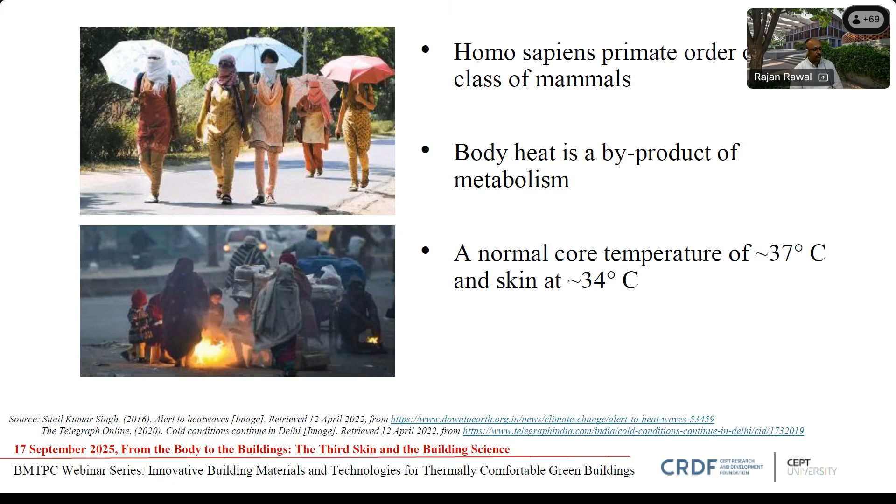If you're using smart gadgets or smart watches, it gives you a body battery as an indicator. If you experiment and remain in a 20 degree centigrade temperature all across the year, you will lose your body battery very quickly. That's an easy way to understand how our body temperature needs to be maintained at 37, and hence the immediate room environment could be around 27 to 29.

If you don't do that, you will have a certain kind of fever, we call it pyrexia or hyperpyrexia. When you go beyond 37 degrees, or when you go below, it's hypothermia, and that leads to certain cardiac or respiratory function problems. If you go higher, it will damage the cell.

Not necessarily does our entire body remain in the same steady state. If your ambient temperature is about 30 degrees, as you can see on the left side, your body would try to remain more or less in the same temperature range. But the moment you go to 20 degrees centigrade, some parts of your body will cool down just to maintain the core body temperature at about 37. So hands and legs will start sacrificing their skin temperature to maintain the core body temperature. Also, the temperature inside our brain needs to be maintained close to 37, because that's where all functions are governed.

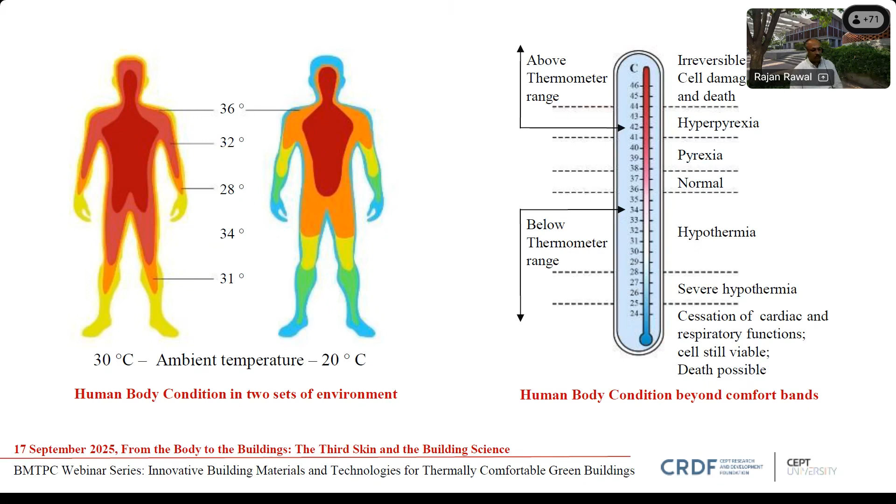If you don't do that, immediately your heart rate will go up, and psychologically you will start losing concentration. You may feel a little more irritated, and if things go beyond control, vomiting is one of the best ways our body can throw out heat.

If you cannot throw out the heat through the skin, all the food which you have taken will come out through vomiting, and you might be able to reduce your core body temperature. Beyond that, it could be fatal and needs to be addressed very quickly.

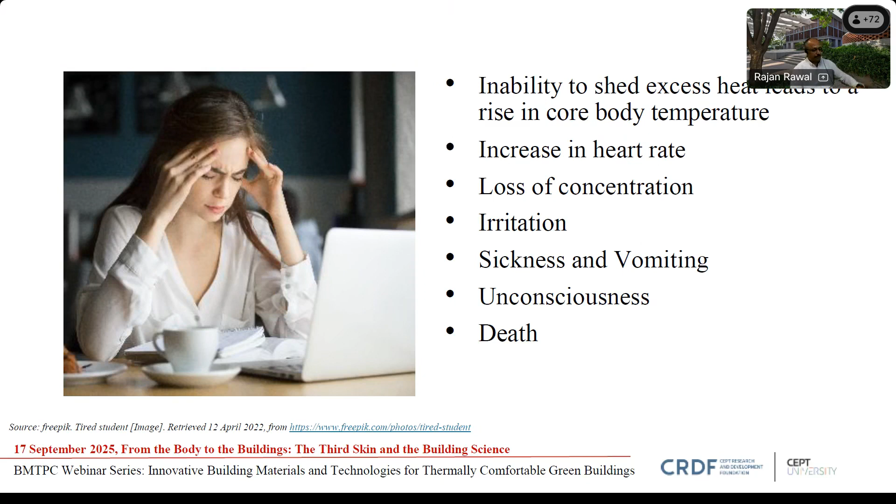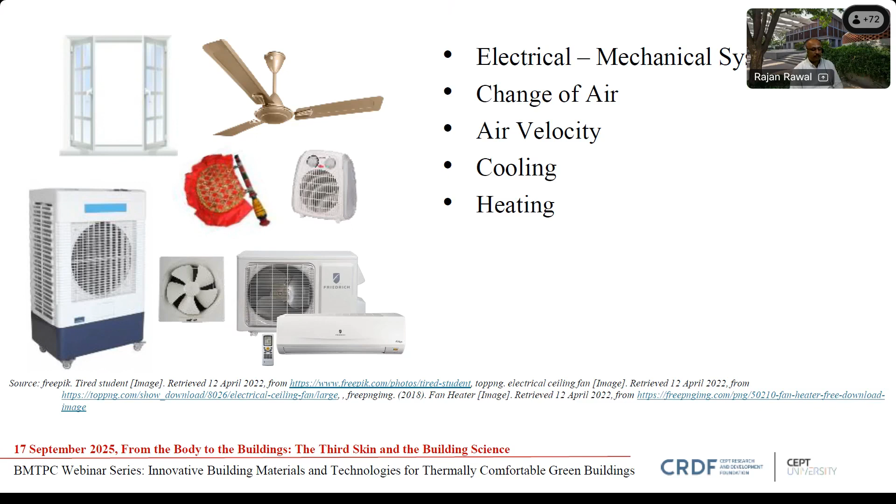Now, let me explain. To maintain our core body temperature, we use various mechanical and electrical systems, whether it's cooling or heating, and all of them cost energy. Energy has an impact on the environment, and so on and so forth.

So nowadays, access to thermal comfort has become a challenge. Not everybody has equal access to a cool or comfortable environment. Hence, at the national level, when you start building buildings, whether it's Prime Minister Awas Yojana houses or any other institutional building, thermal comfort has become a priority. It has been taken very seriously by BMTPC as well as some other government agencies.

What is very important is that generally people say, okay, if buildings are uncomfortable, we'll put an air conditioner in it and we will be able to manage the temperatures. But you know that air conditioners will consume not just electricity.

Yesterday was Ozone Day. A lot of posts came out saying that the ozone layer is now coming back to its original state, but still we have a long way to go. The kind of refrigerants we use in cooling systems also damage the environment, having a very high GWP, that is global warming potential, which also harms the environment. So it's not just about electricity and CO2, but many other gases that come out of production, or sometimes leakage of cooling devices, that need to be taken care of.

So the way we generally explain it is that it is always better to invest in buildings for the long term. We always say that the lock-in period for a building is about 60 to 80 years. If you go wrong in decision making for cooling, or for light bulbs, you might have an opportunity in 5-7 years to change that and correct your mistake. But if you make a mistake in a building, you will get locked in for about 60 to 80 years before you start changing, reconstructing, or retrofitting your building.

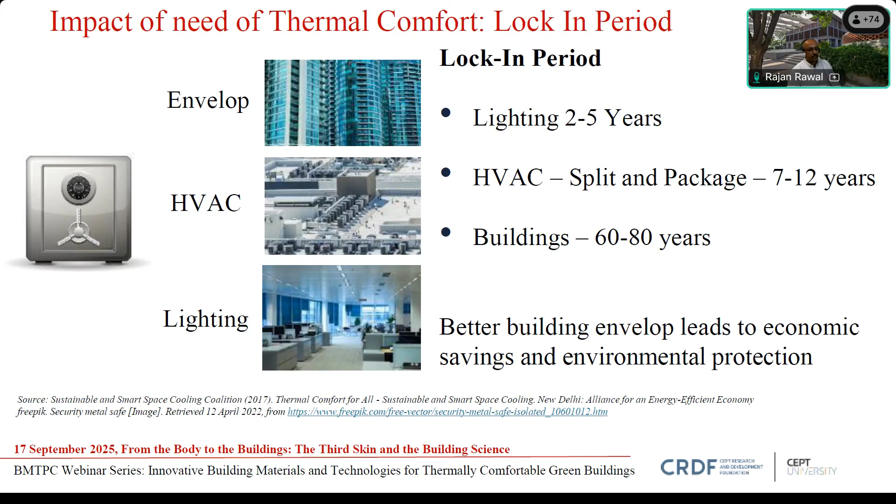So it's always important, economically also, that we keep investing ourselves into better building design and construction, and more so nowadays, not just in design and construction, but also in the operational part of it.

Some of the numbers which you might have seen in earlier webinars show that urban and rural population is going to go up. What is very, very alarming now is that throughout the coastal belt, from Bhuj in Kutch to Jamnagar to Surat to Mumbai to Goa, right on the Kerala coast, or then you move towards Tamil Nadu.

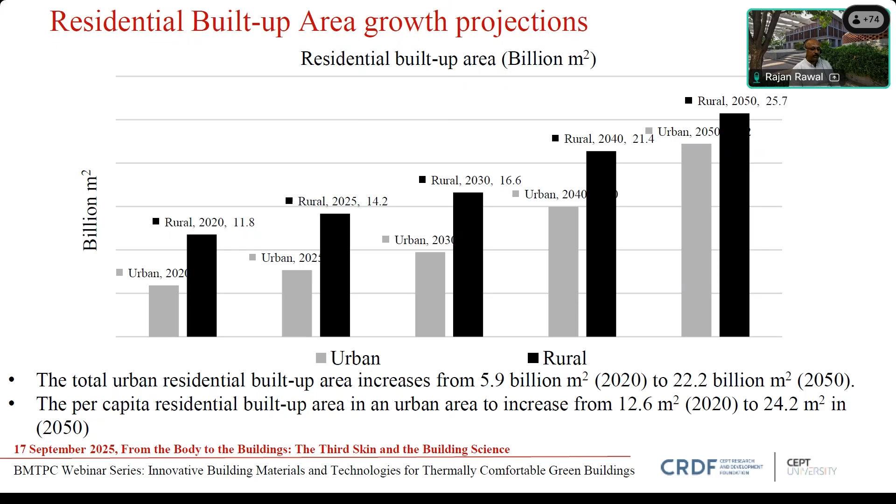Lot of cities located in coastal areas are going to face not just air temperature rise, but also high humidity. This is where Shaileshji mentioned heat stress, and I'll explain later the difference between thermal comfort and heat stress. Heat stress is where physiological functions get compromised and productivity goes down.

Over the years, we are getting more and more hotter days, not just hot days but also longer spells. Earlier we used to get about 40-42 degrees for about a week or so. Now 42 degrees remains for about 20 days in many parts of the country, going up to about 45-47 for a couple of days.

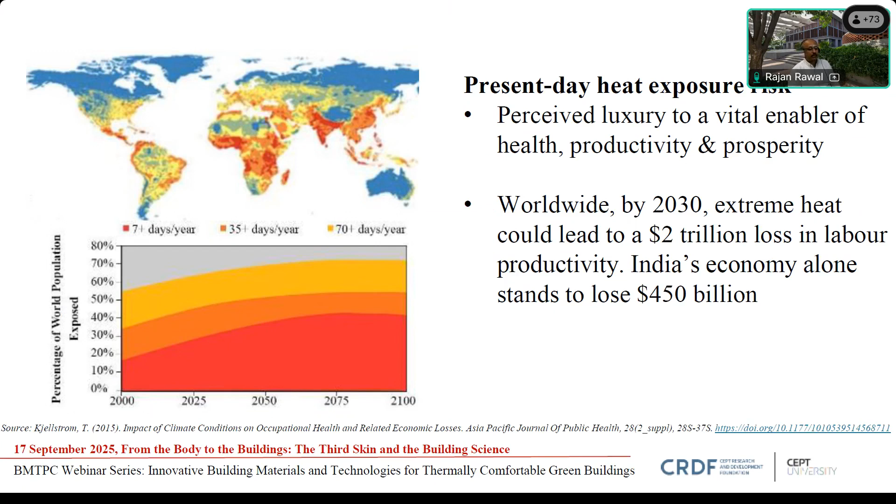That is where it's not just about the peak, but the consistent peak getting longer in terms of days. So let's understand thermal comfort. We understand it with 4 environmental parameters and 2 personal parameters. The environmental parameters are air temperature, relative humidity, air velocity, and mean radiant temperature. I'll explain them in a while. The 2 personal parameters are metabolic rate and clothing value, the amount of insulation on your body.

Other than that, acclimatization is a short-term physiological adjustment. If you move from one city to another for a weekend or 7-8 days, you might acclimatize as a short-term adjustment. But if you spend about a year or more in a city, for example someone going from Jaipur to Chennai, it might take about a year to get acclimatized to high humidity, or vice versa. Someone from southern India moving to Rajasthan also needs acclimatization for lower relative humidity.

Other things matter too, like body shape and fat. BMI definitely makes a big difference. The higher the fat, the lesser the ability to push heat out, and hence one needs to sweat more to push body heat out through the fat.

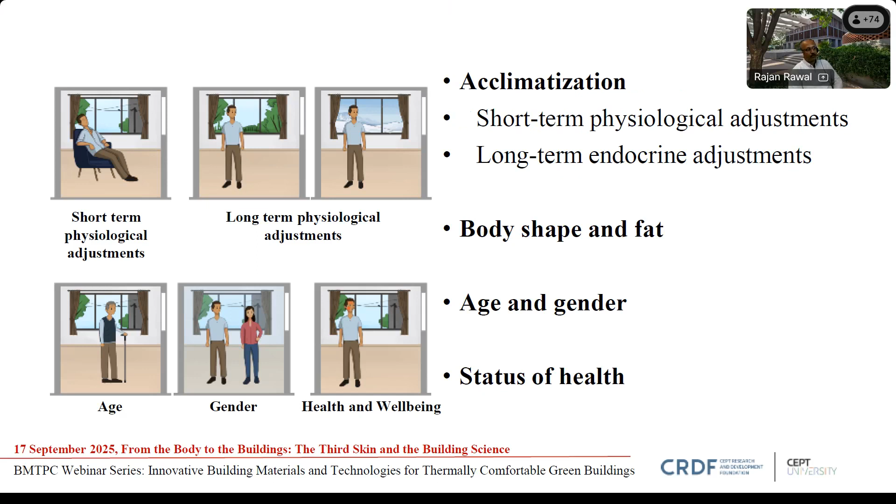Sometimes the status of health also matters - if someone is under the influence of medicines or even alcohol, that affects thermal sensation and thermal comfort. But these are things we really don't consider when designing a policy or a building. We focus a bit more on these four plus two parameters.

At the same time, your body does not remain at the same temperature across its surface. The forehead and top part of the body try to remain more or less at plus minus 34-36, versus the foot and calf, which has a huge range of about 10 or even sometimes 12 degrees centigrade. So if you're at a neutral temperature of about 27, your forehead would be about 35, deviating to about 31 on the lower side, or up to about 2 degrees higher if outside temperature is higher. So it deals with a delta of about 4, 5, or 6.

But if you see at the bottom, the foot has a delta of about 13 degrees. That's where the ability of humans to adapt to both immediate outdoor and indoor environments makes us a bit different from the rest. So we have high adaptability, as you can see here - a wide range of temperature can be adapted to.

Now the problem is that when anyone starts exposing themselves constantly to a narrow band of temperature - for example, if I remain in a temperature band of 24-27 all the time, 24/7, in an air-conditioned office, in air-conditioned transport like my car, aircraft, or public transport, or in an air-conditioned home, bedrooms or living rooms - constant exposure to this narrow band of temperature will reduce our adaptability over a period of time.

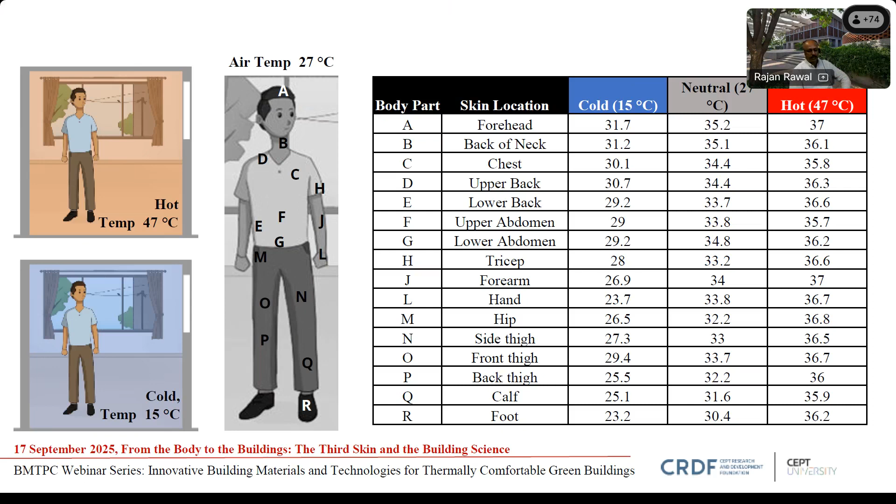Coming to those four environmental parameters: air temperature, many of you know what it is, measured in degree centigrade. Relative humidity, and now this is becoming more and more crucial nowadays because more vapor is available in the air.

All that ice and all those glaciers melting is not just turning into water, but high temperature is also turning that water into water vapor at some point in time. And hence the high humidity across the world has taken the attention of many people working in this area.

Relative humidity is basically the amount of vapor in the air. Now many of you might know that if air is at high temperature, it can absorb more vapor, versus if air is at lower temperature, it can absorb lesser vapor.

That means very high humidity, that means there is no additional space for vapor to get in. It's 100% saturated air, and it will start condensing if it is at 10 degrees centigrade.

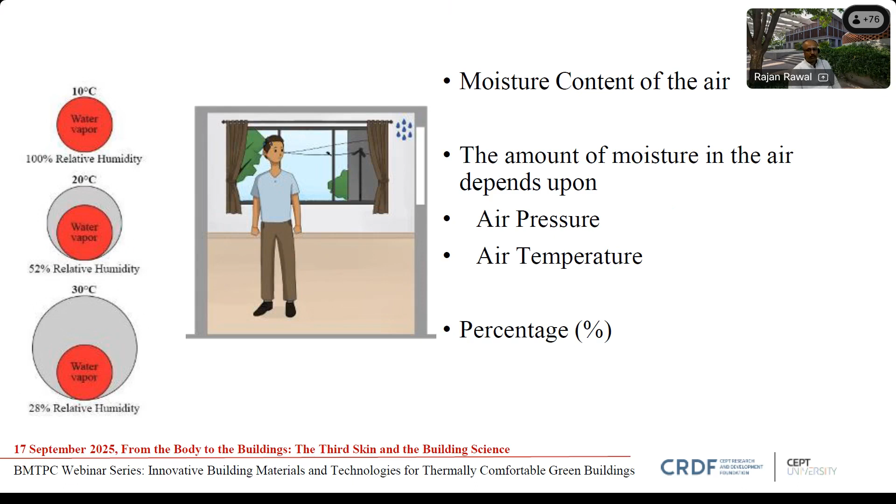But towards the monsoon side, when temperature remains high and humidity remains high, people get into a very uncomfortable situation. And actually that gets translated into market trends - the sales of room air conditioners pick up more near the monsoon than at the onset of summertime.

Along with that, a very important element, which is mean radiant temperature. You might have observed that your room is at a comfortable lower temperature, but because the walls and roof are at high temperature, they're warmer, you feel a little bit more warm.

This is where our human body works with an immediate - I call it a third skin, which is the building skin - such that if the surface temperature of a wall and roof is higher, even though air temperature is lower, still you will not be able to feel comfortable.

Many of us have experienced this when traveling in air-conditioned bus coaches, or in cars with the air conditioner inside - if solar radiation is hitting your window pane or windscreen, you will still feel very uncomfortable. Indoor temperature may be set to about 18 or even 20 degrees, but constant radiation hitting your skin will make you very uncomfortable.

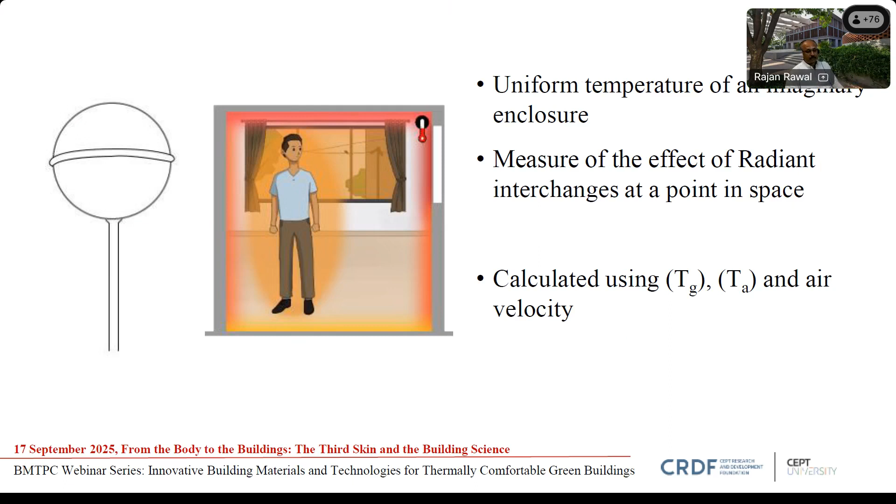And that is where mean radiant temperature comes into it. This parameter has the highest impact on our human body because it interacts with the skin permanently. Even if you are wearing clothes or even a blanket, sometimes the infrared radiations do exchange.

Air velocity, we have very well understood. The moment you start a ceiling fan or a pedestal fan, or if your windows are open and you get a breeze inside your house, you will start feeling more comfortable.

This is primarily because the air which is touching your skin takes away the hot temperature, so a higher skin temperature gets absorbed in the air and the air moves on. So basically in thermodynamics, we call it convection - because of the high convection, you are losing body heat.

So if you are feeling very uncomfortable towards the warmer side, you get inside the room. The moment you start the ceiling fan, your body will start losing heat in a much better manner, and hence the air will pick up the heat and move forward. So that's where air velocity becomes more important.

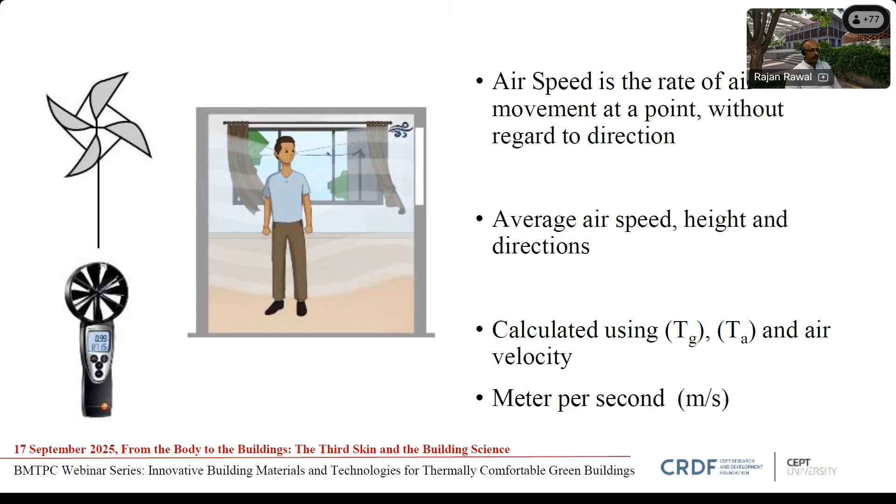Obviously, the clothing, what you are wearing, if you're just wearing a swimsuit or a cotton t-shirt with half sleeves, you will feel a little bit more comfortable, versus a three-piece suit which will make you uncomfortable because the clothes are also an insulation on top of our skin.

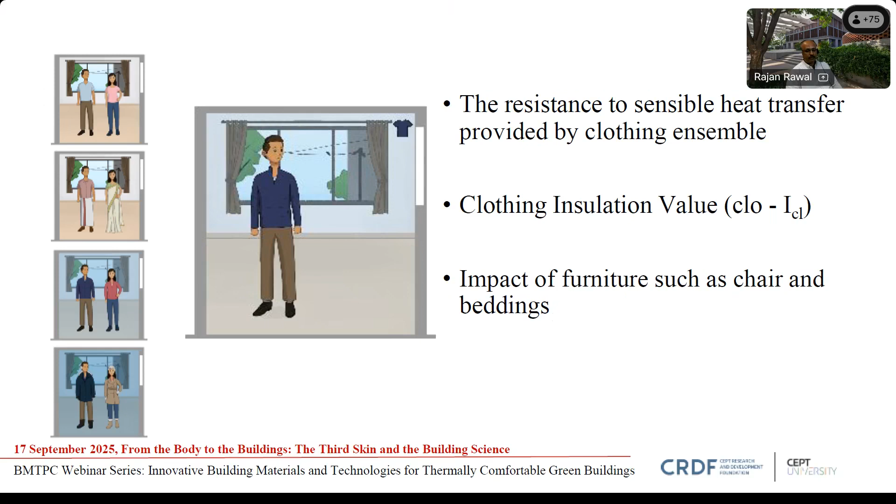So the way we explain it is that skin, what we've got, is a biological skin from nature - that's the first skin. The second skin is what we wear, which is clothes. And the third skin is what the buildings are. If these three don't interact with each other, if we don't understand these three all together, we might not be able to solve the kind of problems which we are trying to.

The sixth one is the metabolic rate. So if somebody is gymming, the person is definitely burning a lot of calories in their body. That calorie generates heat, and that heat needs to go out. On average, if a person is in a sedentary position - for example, if you're writing or typing on a computer - you might generate about 60 to 65 watts of energy. A normal adult has about 1.8 square meters of skin area. But if you are gymming, you can emit up to about 180 or sometimes 200 watts of energy. While you sleep, it goes down to about 40 or 45.

So the amount of body heat you generate needs to be taken out of the building. And buildings are not really designed to do that, and hence many times we use air conditioners, especially in areas where heavy workout or heavy activity is taking place.

Now I know many people will also talk about the quality of air in gyms or in auditoriums where you have a lot of people, but we are right now not talking about environmental quality there. We are just focusing on the thermal side, or thermal comfort side, of the body.

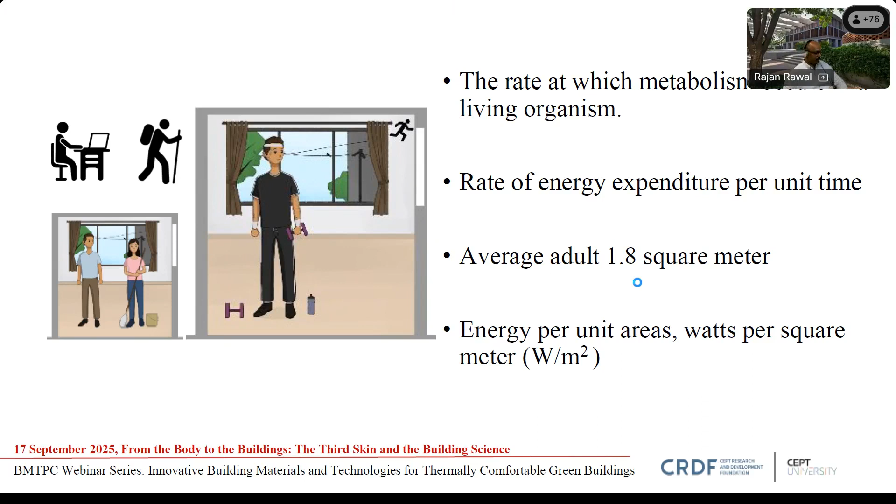So what is the definition? The definition is that it's a condition of mind that expresses satisfaction with the immediate thermal environment, and it's basically measured through subjective evaluation. Now, this is one of those rare scientific definitions accepted across the world which doesn't have numbers and doesn't talk about any particular formula. It says that it's a subjective evaluation.

That means it is a vote. So if somebody has to say what is your BMI, the body mass index will have a certain kind of formula, and it would say per person it would be X and Y and so on and so forth. But here it is more like a vote, where it says, yes, I'm comfortable, or I'm not comfortable. Now when I say I'm not comfortable, it has two dimensions to it.

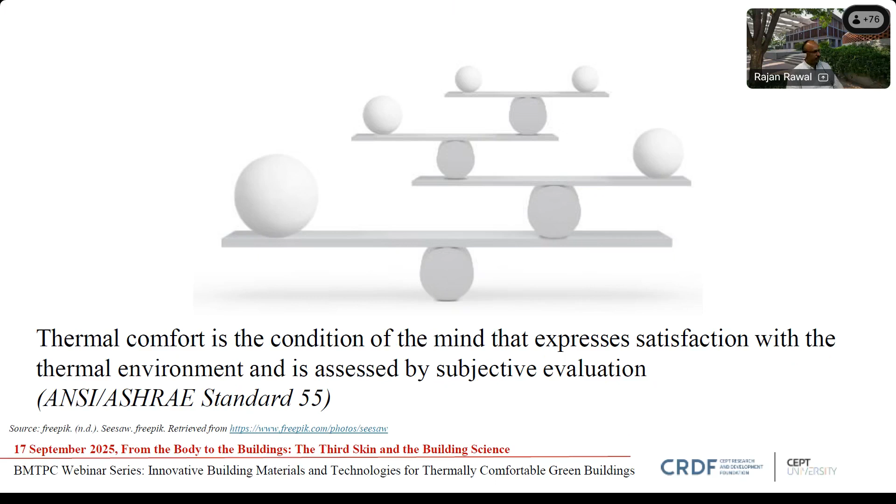But before that, let me explain that our thermal sensation does change depending upon where we are. Psychologically, that makes a lot of impact on us. So the way you perceive thermal comfort, the way you want to have thermal comfort in a 5-star hotel or in a cinema theater, you do not expect the same kind of thermal comfort when you go to a vegetable market, because psychologically you know that the vegetable market is a naturally ventilated building and it cannot provide you the same kind of cooling or comfort which you generally expect in star hotels, aircrafts, airports, or even cinema theaters.

So because our mind is very closely monitoring what the skin temperature is, it has a psychological and behavioral impact. And hence, it is more like a vote than an absolute value.

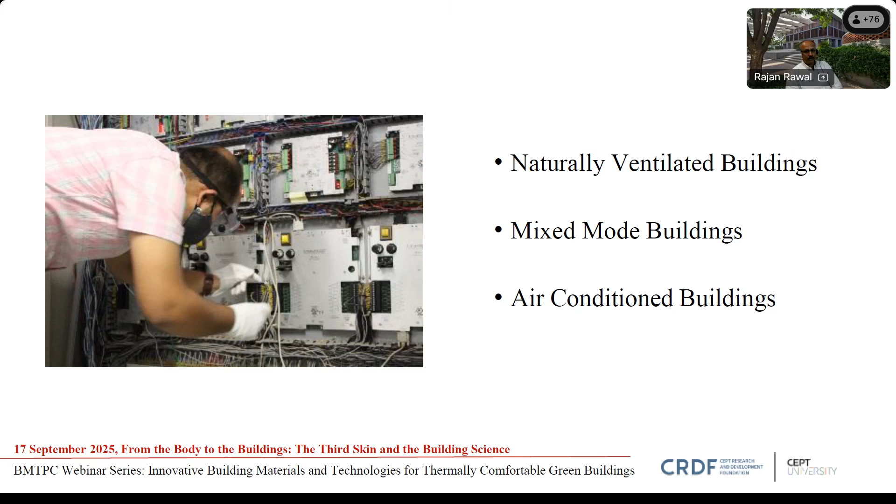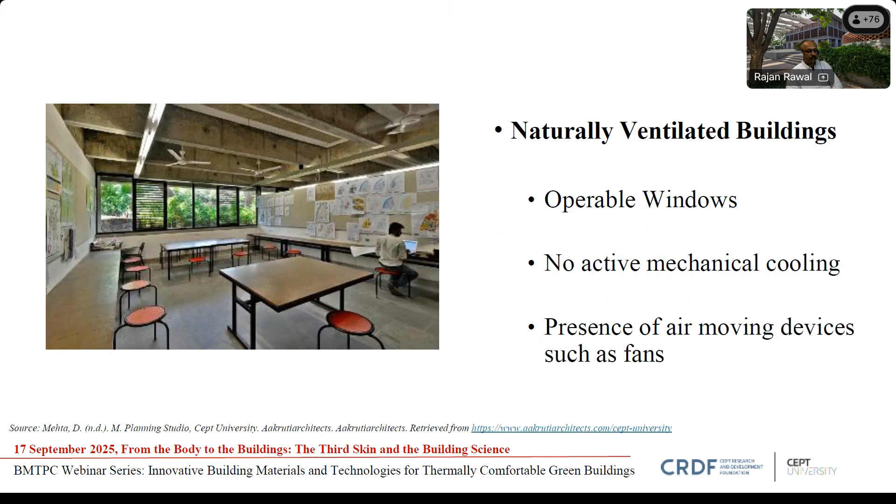So when you are in a naturally ventilated building versus an air-conditioned building, you have a different kind of opinion about thermal comfort. So what is a naturally ventilated building? Basically a building where you can open windows, you have no active mechanical cooling - you may still have ceiling fans, but you are not compressing the air or changing the property of air beyond the air velocity. These are called naturally ventilated buildings.

Mixed mode buildings are somewhere in between. They do use air conditioner at some point in time, but they do not use air conditioning at other points in time. For example, many of our residences, where in summertime, summer nighttime, bedrooms become air conditioned, but the rest of the house is not air conditioned, or the same bedroom does not get conditioned during the winter time.

So there are various subtypes of mixed mode buildings. Some of them are spatial mixed mode, some are temporal mixed mode, and the third one is concurrent mixed mode.

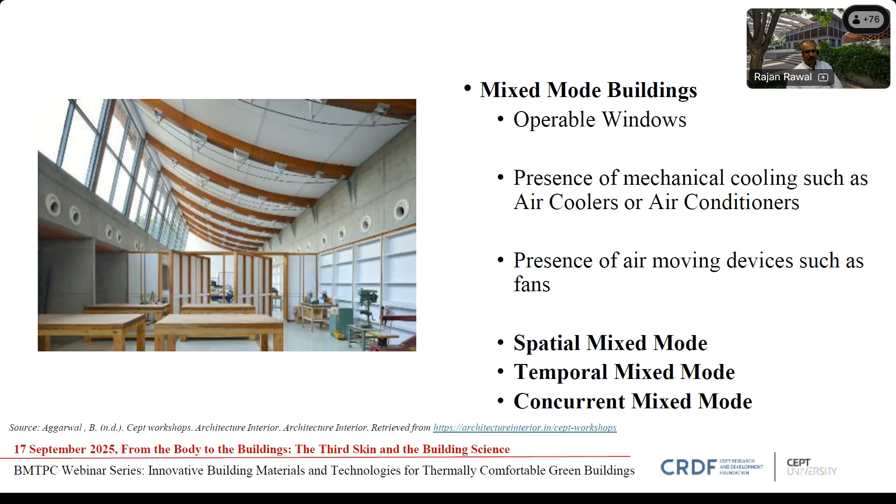Concurrent mixed mode is very similar to what our wedding shamiana, book fair, or automobile trade fair looks like, where your windows are open but air conditioning is also running. So it's a concurrent mode where air conditioning is running, windows or doors are open, and you are trying to get thermal comfort.

Air conditioned buildings are generally sealed buildings, using compressors and air conditioners, and most of the time it gets operated when there is occupancy.

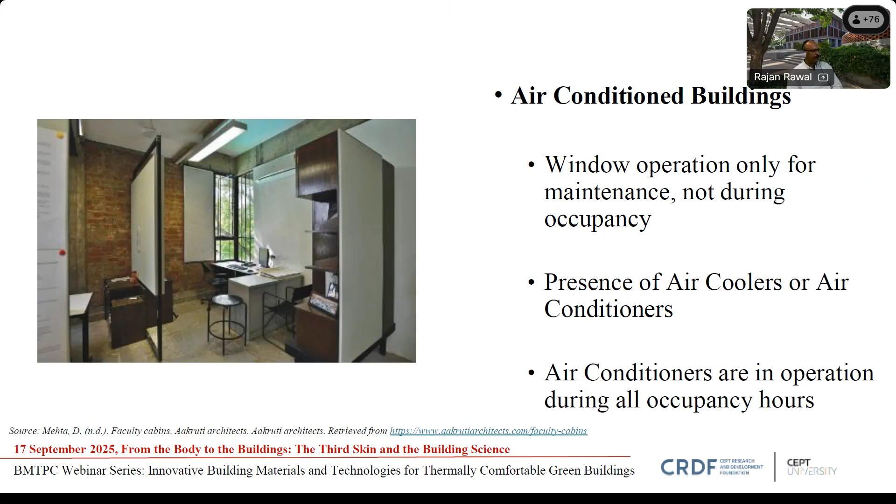So this is what I was talking about earlier, that any kind of thermal comfort gets assessed through four votes. And when I say vote, it's not a value, but simply an opinion. For example, four parameters: sensation, acceptance, preference, and satisfaction. I'll talk about that in a while.

So if I ask someone, are you thermally comfortable, that depends upon what that person is saying about its sensation. The way to ask is, are you feeling hot, or cold, or neutral? That is what we call sensation - what is your sensation at this point in time? But that sensation is not enough for us to judge whether the person is comfortable or not.

We would also like to know the acceptance. Sometimes you feel warm, but you want to feel warm after coming from a very cold area. And if the warm immediate environment is acceptable to you, then it's fine. So that comes to preference.

So that means, are you comfortable? You say, no, I'm feeling a little warm - that's a sensation. Is that acceptable to you? I would say no, it is not acceptable. Then the third question comes - if it is not acceptable, what do you prefer? People say, I prefer a little cooler environment. These three things come together and tell us whether the person is comfortable or not.

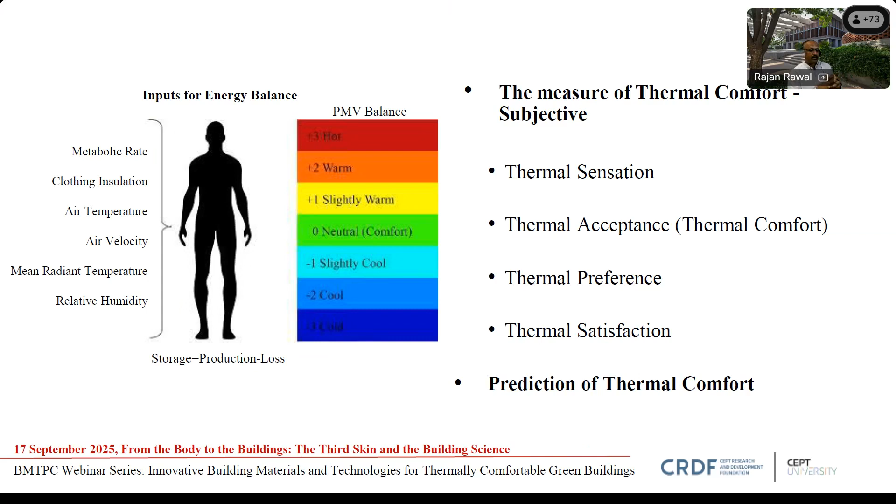Largely the Indian population, if you ask people what's your sensation vote, they say, oh I'm feeling comfortable, I'm fine, I'm just okay. Then if you ask, is that acceptable to you, they will say yes, it is acceptable, I don't need anything, I'm fine.

But when you ask, what do you want to be - if given a chance, if you want to change your condition - I would say 90% of the population in India say we want to be cooler. And this is where the aspiration of the person comes into the picture: I am feeling comfortable and okay with that, but if you can give me, I would like to be cooler. Now that is where you are paying a penalty on the environment.

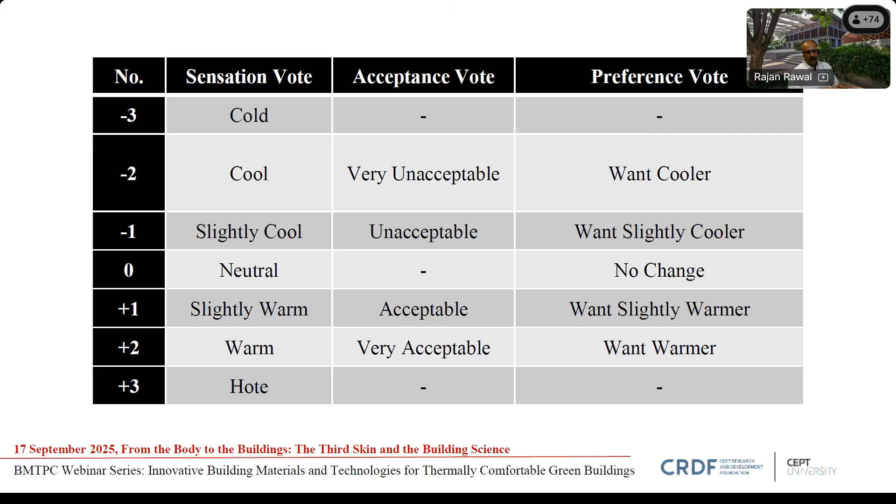You're not just paying on environment and economics, but also putting a penalty on your own body, where you know your body could be comfortable at 27 or 29 degrees, but you still want it to be 21 degrees. That means you are putting your body into thermal stress, and hence you will spend more calories to keep your core body temperature at 37. That means you require more calories, hence you will eat more, and so and so forth.

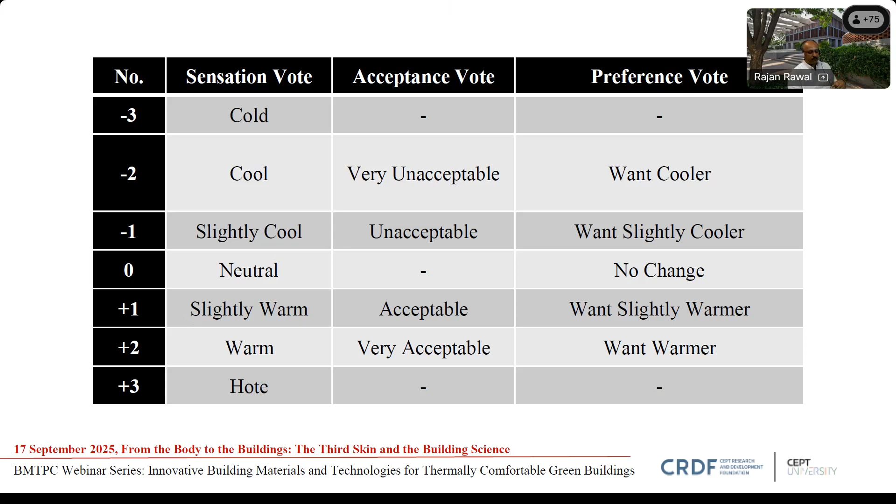So basically it's a downward spiral we get into - conditions are good enough for us to operate, but given a chance we want to be cooler, and that means a whole lot of other things, as I explained. That's a bit of a concern for many of us.

So when you put all these parameters - air temperature, radiant temperature, and velocity - all together, and the person says I'm comfortable, that means it's neutral, and that is what we call it. 100% people being satisfied - but it is very, very unlikely that in any building 100% of people are 100% satisfied.

That means we have to have a certain kind of band, under which for whatever reason - whether BMI, or because somebody has migrated from somewhere, or is under health conditions different from the rest, or wearing different kinds of clothes - they might feel uncomfortable towards the warmer side. So generally the guidance we try to provide is to accept that 20% of people may be dissatisfied.

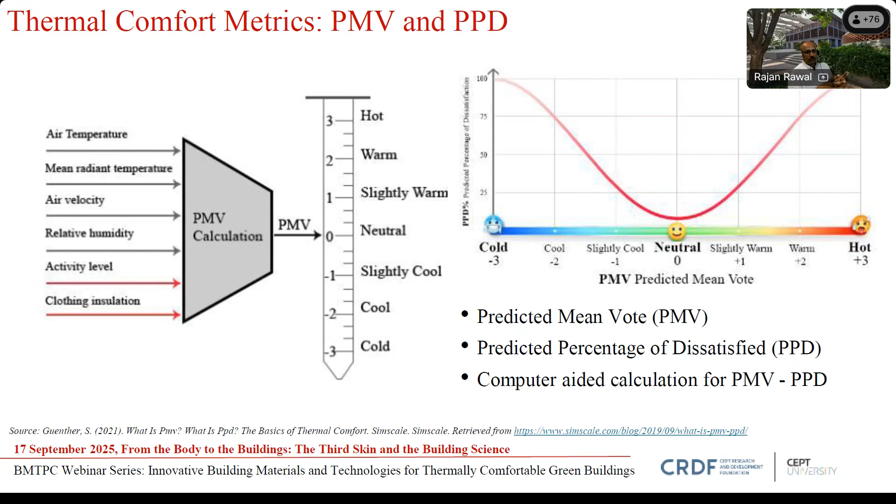We call it predicted percentage of dissatisfied, PPD. If you look at this graph, which is a bell curve, where if you move towards slightly warm or slightly cool, the vote is +1 or -1. The moment you hit close to +1, about 20% of people are not going to be satisfied, and we say okay, it's fine. 80% of people are comfortable, and that is what all buildings can target and achieve.

What is the impact of that on the policy?

The Eco-Niwas Samhita, which is the residential code relying on Residential Envelope Transmittance Value, RETV, has taken up these conditions so that our houses should not become hot and there has to be some degree of comfort. Hence, they adopted something called degree discomfort or discomfort degree hours. That means in that particular house, based on its design and construction, the discomfort degree hours should be less than X amount, and if you read that you will find what this X means.

The same thing has been adopted in the National Building Code, looking at the diversity of our country, from Meghalaya and Arunachal Pradesh to Rajasthan and Gujarat, from Jammu and Kashmir, Ladakh, to Maharashtra, Nagpur, Vidarbha, and Kerala. It's very difficult for people to come to one value acceptable to the entire Indian population.

So the National Building Code and the Energy Conservation Building Code from the Bureau of Energy Efficiency say we don't prescribe a single value, we prescribe a band of values. That means if you are within this range, you should be good enough, and that range could change depending on where you are located. Sometimes people coming from a hotter environment would like to keep higher temperatures, and people from cooler environments would prefer lower ones. But for a building designer, it's important that they don't need to hit one value — it's a band they have to play around with.

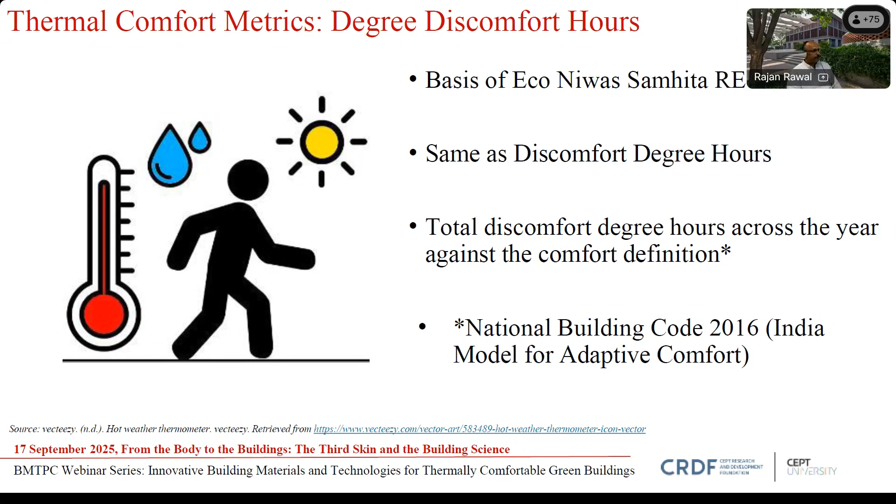If we try to understand this physiologically, people started looking at it in 1930 — how much heat you produce, what's your skin condition, your sweat, your clothing, and how much heat you're able to reduce. We call this a heat balance, similar to physics or even accountancy, like a profit and loss balance account. The amount of income and expenditure, if it becomes zero, you don't need to worry about it.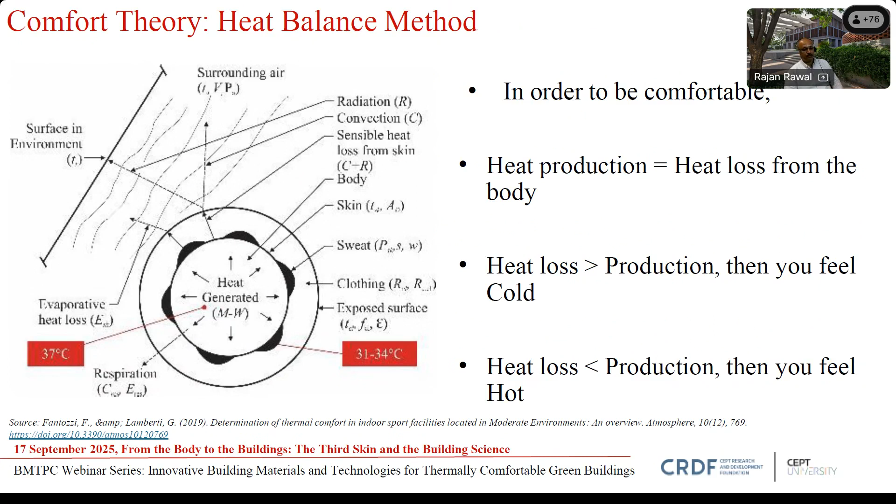The same happens here — if the amount of heat you generate can be put out of your body, you are comfortable. That's the concept people follow: how do you produce heat? Through metabolism, you gain some through conduction, convection, radiation, you shiver, and you also lose heat through evaporation, which is perspiration.

If you hold a warm cup of coffee, that's conduction. If you sit in the open air or at the seaside, that's radiation. When you switch on a ceiling fan, that's basically convection — that's how you also lose heat. When you balance between these, you will be comfortable.

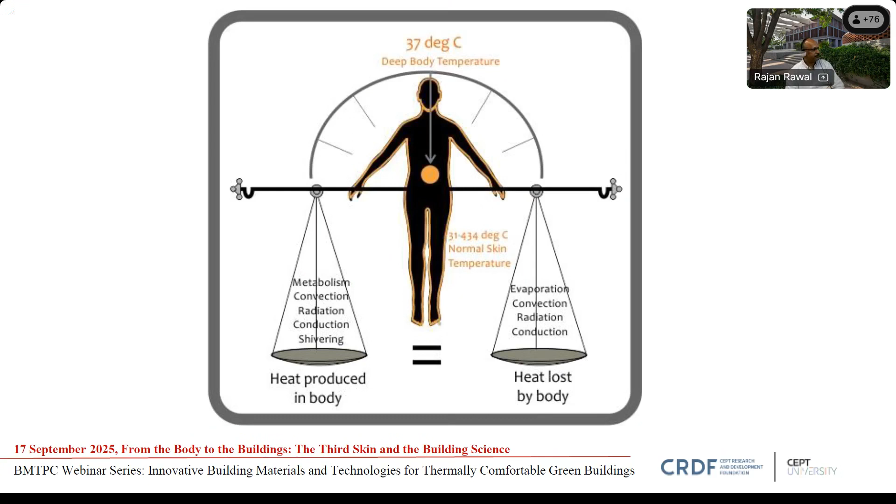There are equations behind this which I won't get into in detail, but what I'm trying to explain is that the body also stores some heat over a period of time, and that needs to be accounted for. When I move from a very hot environment outside into a very cool environment, it takes a little time for us to adapt — this is because the heat stored inside the body also needs to be released over a period of time.

Now, let me explain this and then go on to the heat stress side.

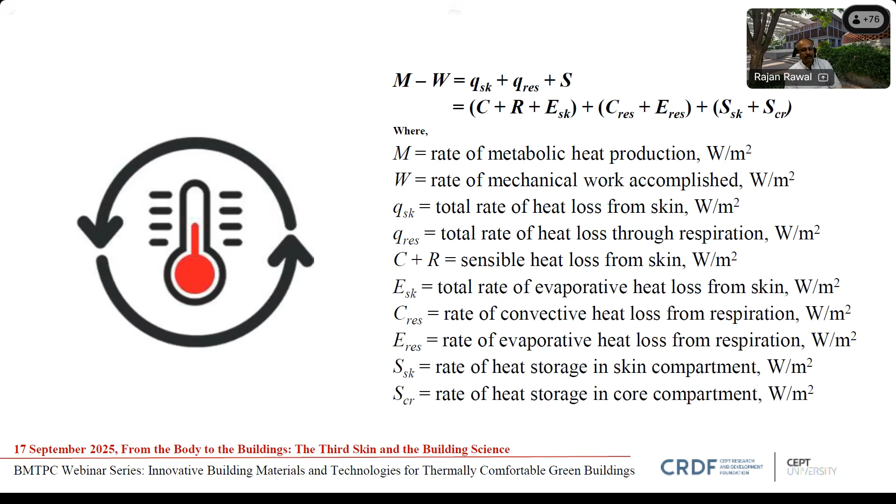The equations, which are physics-based, had a lot of limitations, and this was practiced until 1990. But from 1995 onwards, all of us realized that our body is not like physics, it's not like a machine — we have a mind, certain aspirations, and feelings. So it's not just about physiology, but psychology and behavior also play a role. The newer codes and guidelines, like what BMTPC follows, are based on what we call the adaptive thermal comfort model. As I mentioned earlier, when you go to a vegetable market, you know it cannot provide you 22 degrees centigrade, and you accept it.

That's where the psychology works. When you are coming from outside to inside and you feel that it's warm, hot, or cold, you don't really start cribbing. You wait for about 10 to 15 minutes before you start feeling comfortable. And that's where the psychology comes into the picture.

Second is behavior. When you are allowed to change your clothing, when you're allowed to change your position - we have seen multiple times in cinema theaters that people take a shawl with them, and in the middle of the movie they will wear the shawl. This is where behavior comes into the picture. You are allowed to behave in a certain manner, and the moment you allow people to behave in that manner, they would be more comfortable because that's directly related to psychological aspects.

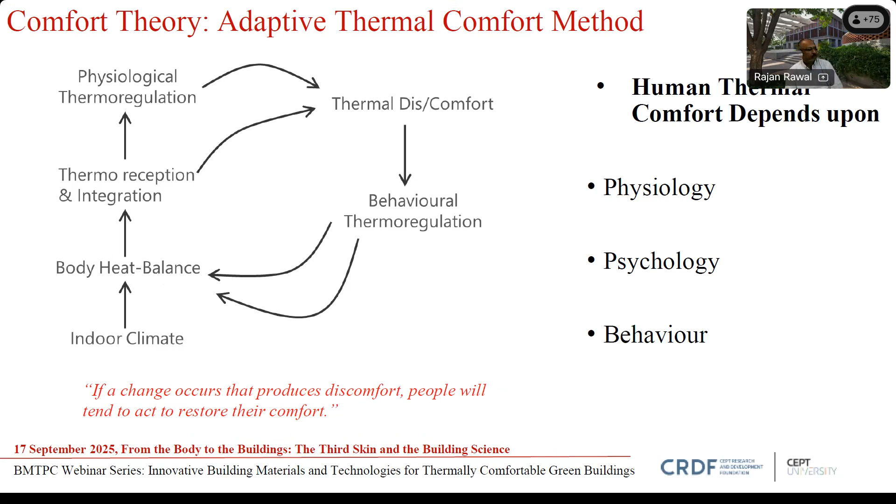So all newer work and the newer policy which the government of India is following is based on this adaptive model, where your building also needs to respond to multiple directions. Let's talk about this, where the building, which is the third skin, comes into the picture. Just focus on the right hand side for a while. There's something called mean radiant temperature asymmetry.

Basically, we are talking about air temperature difference and surface temperature difference. So if your surface is warmer than air, what happens? Let's say if you have a ceiling which is warmer by about 15 degrees centigrade, you are likely to have about 40% of people dissatisfied. That means my ceiling is very, very important, and any change in ceiling temperature affects people much quicker and more widely. Versus if I have a cool wall...

Same 15-degree asymmetry, but a cool wall will make about 20% of people dissatisfied. If I have a cool ceiling, I will make probably about 8% of people dissatisfied. And when I have a warm wall, I'll make about 2% or 3% of people dissatisfied. Now, what does it mean?

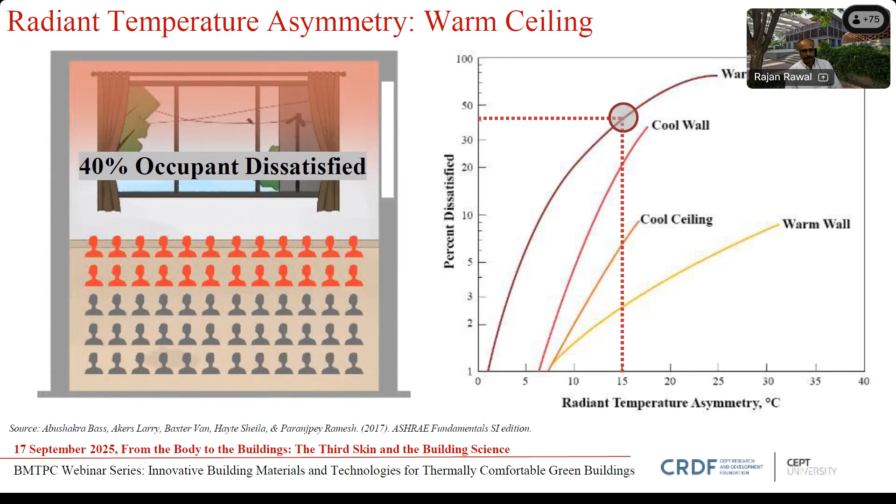As a building designer, or someone who constructs or manages the building, the learning here is that if I have 5 rupees or 10 rupees to improve my building, I will put that 10 rupees on my ceiling. I'll try to reduce the surface temperature of my ceiling. Then if that ceiling is done in 8 rupees, probably I'll put another 2 rupees so that my wall does not become very cool.

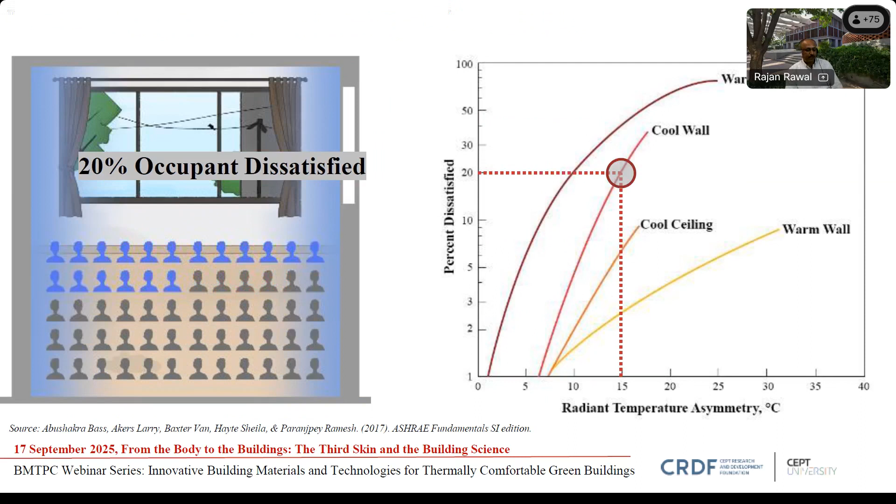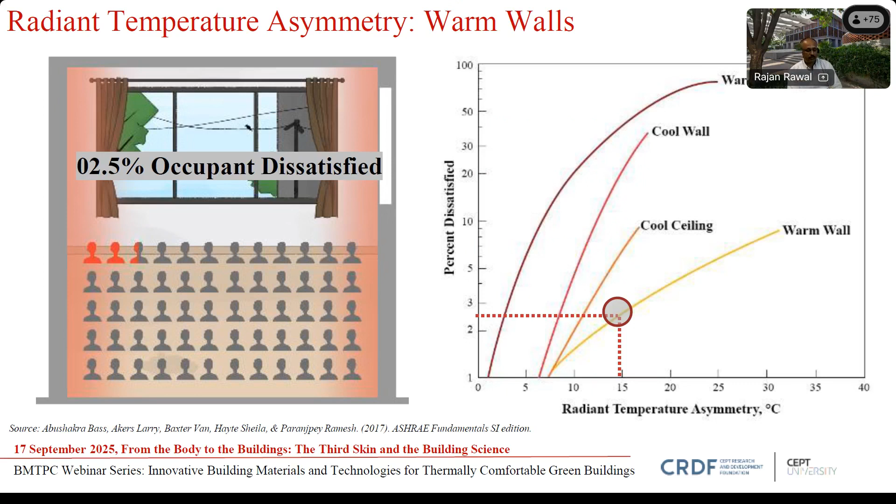Then I will probably try to do something with a cool ceiling, and then try a warm wall. This is how the body behaves with its immediate surroundings, because exposure of the skin or body part to a warm wall and a warm ceiling is different. If I'm talking about ceiling, just my head is directly exposed to the ceiling along with my two shoulders. But if I'm talking about wall, a lot more exposure - my entire body is exposed to the wall. So these things matter over a period of time.

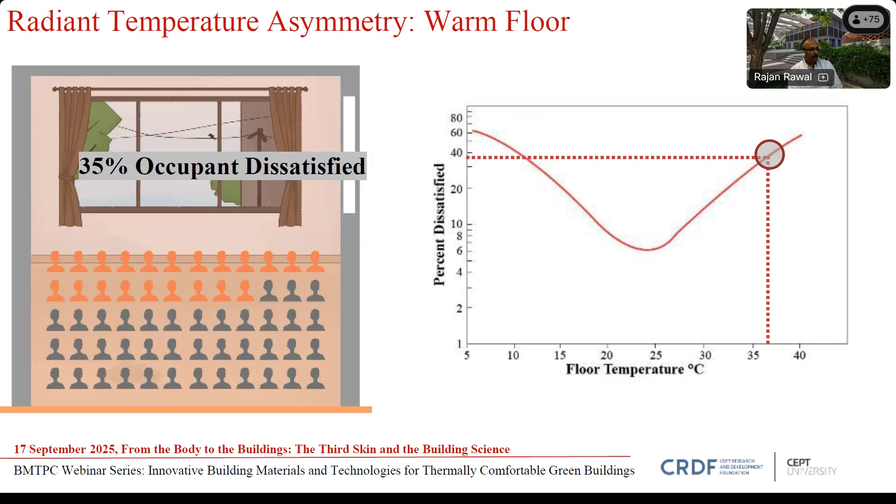Same if you have a floor temperature of about 35 degrees plus, you will find a lot of people unsatisfied. But if you bring down floor temperature to less than 25, people would be more comfortable. So carpets in cold areas or northern India have become a very effective way of managing temperature, because that gives insulation. Now, same floor, when you move towards Karnataka, Tamil Nadu, or even Kerala, the use of stone becomes very important, because that gives cooler surfaces on the floor, and you feel more comfortable with the floor having less than 25 degrees centigrade.

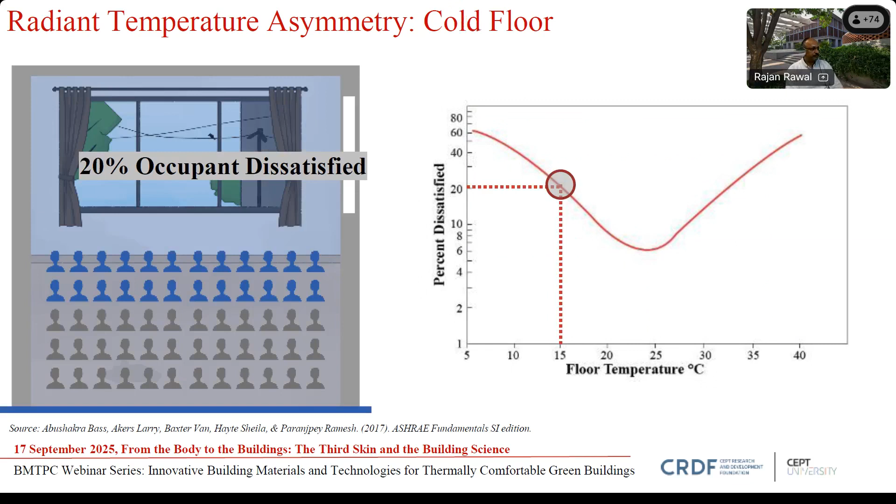It's also important that within the body we should not have a temperature variation of more than about 3 to 4 degrees. As you can see, if my feet are warmer, or the difference between feet and head is about 8 degrees, a lot of people will feel uncomfortable. Where I reduce that to about 3 degrees, less than 10% of people would be uncomfortable.

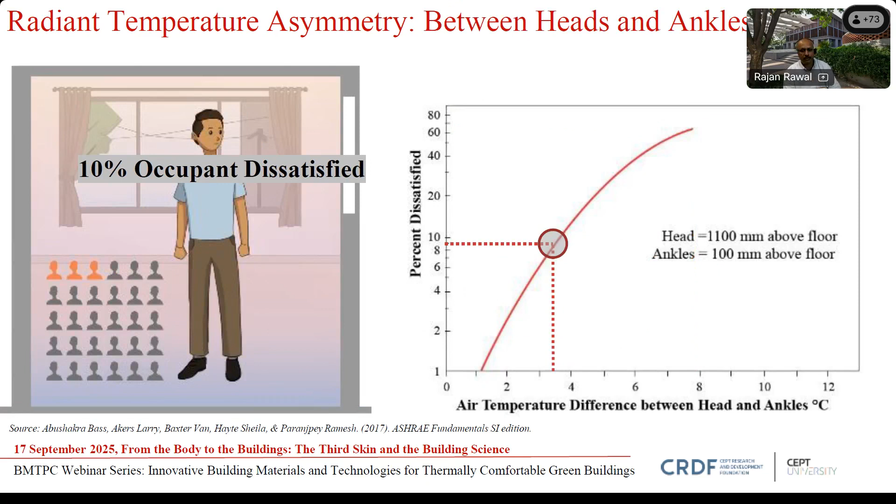So this is where the third skin, which is where physics comes into the picture. Whether it is an earlier time, whether it is old times where we used to make huts, or in the future when we'll move to Mars and the Moon and try to make our houses there, the building skin is going to play a major role. We will still be able to manage our body temperatures and our clothing, but if the third skin is not helping us, the first two skins will start struggling a lot.

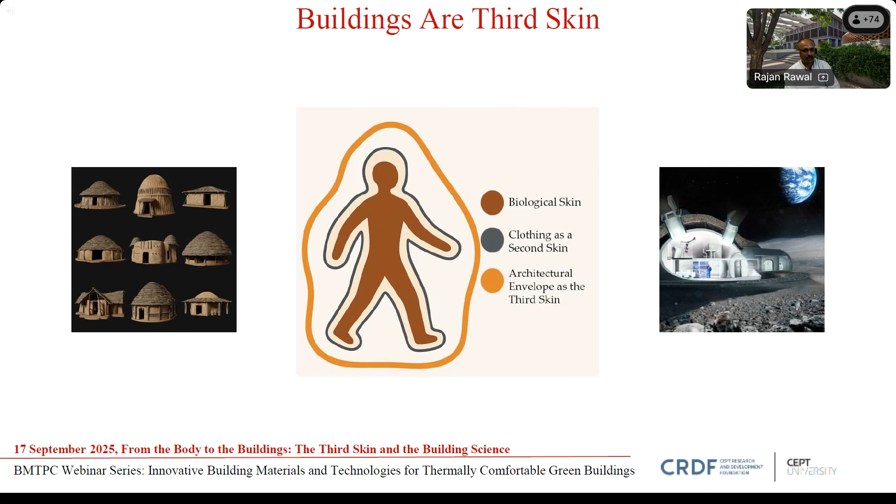There are various ways by which you can manage your heat transfer depending upon which climate zone you are in. The Energy Conservation Building Code and National Building Code has recognized 5 climate zones, and depending upon which climate zone you are designing your house, it gives you an understanding of whether you should give importance to wall, roof, or fenestration, which is windows, and so on.

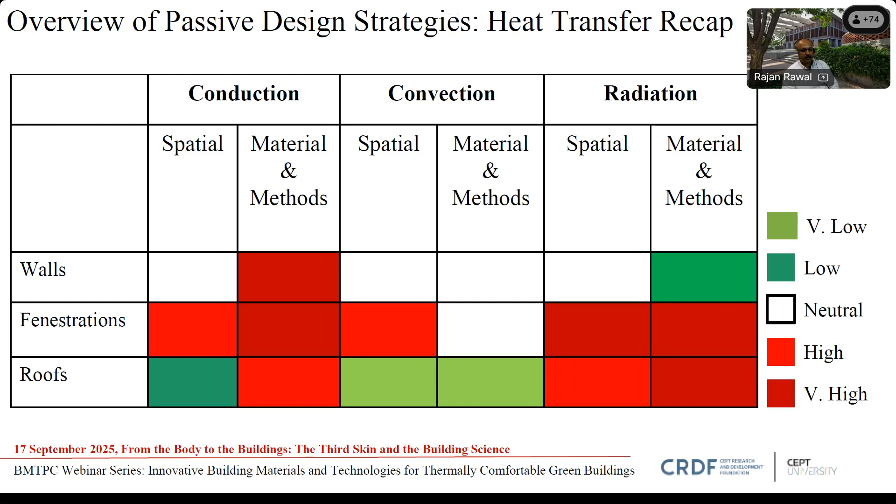Now, there are 2 ways you can manage these things. One is design wise, and one is material and construction wise. I'll focus a little bit more on material and construction because that's the focus of BMTPC. There are a whole lot of other design features possible, but materials and methods are quite important.

Some materials have the ability to reject heat, which is insulation materials, like EPS and XPS. There are some materials which have the ability to store heat, like stone or bricks, and depending upon the temperature variation, they release the heat. Both of them are helpful. At some point in time people said we should do insulation. Insulation is helpful, but thermal mass, which stores the heat, is also very, very helpful.

So when you are in extreme conditions where you cannot open the window at all - India doesn't have any of those situations, even in Ladakh, I mean non-armed forces conditions - if you're in Ladakh, you would like to have thermal mass a little bit, where you can capture the warmth during the daytime and use that warmth at nighttime if you're making your building out of stone. But at the same time, insulation is important because that's where you reject the heat right away.

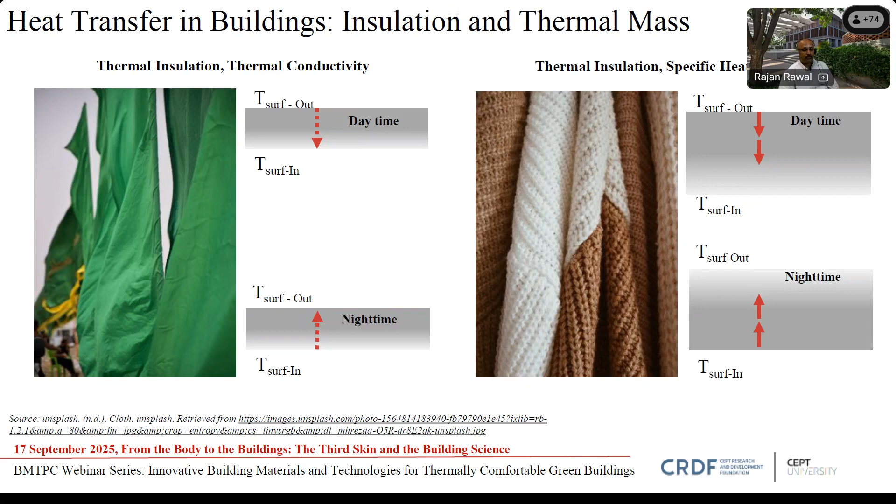This is the way we try to understand heavily industrial material. For example, if somebody is doing a building in an area where land cost is very, very high, obviously the carpet area is going to sell, and that's where the economics make sense. So instead of going for a 200 mm thick brick wall, one might go for a thinner wall with insulation. So what you're seeing here is the overall thermal transmittance value, we call it the U value, of all these, what you see on the screen, is 0.4.

I can achieve this 0.4 with a 200 mm brick wall, or I can achieve that with 80 mm of EPS, or I can achieve that with 60 mm of polyurethane foam, or sometimes 10 mm vacuum FRG as well.

But if you are building something in a rural area where land cost is not going to get high, you have a challenge of accessing insulation for construction. People will not be able to manage insulation on wall. Obviously, you can go for vernacular material which is available in nearby areas. So when people say insulation is a must, I'm saying no, depending upon the situation and economics, you need to decide where you want to use what.

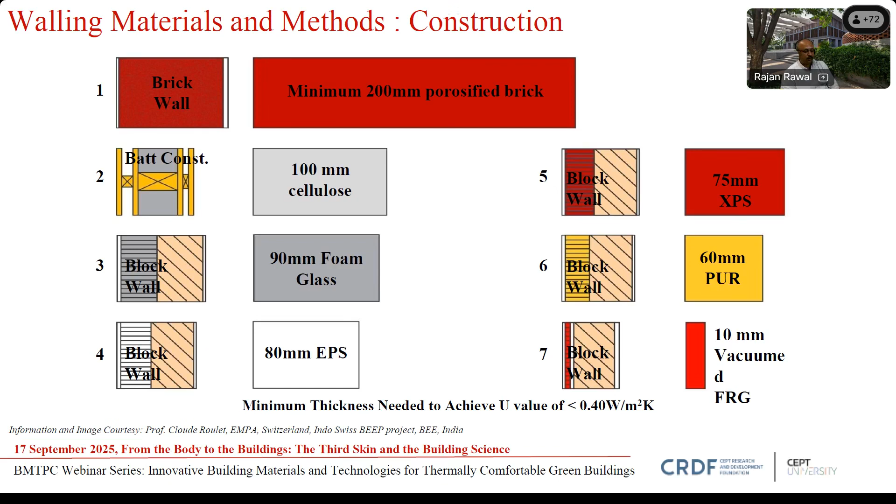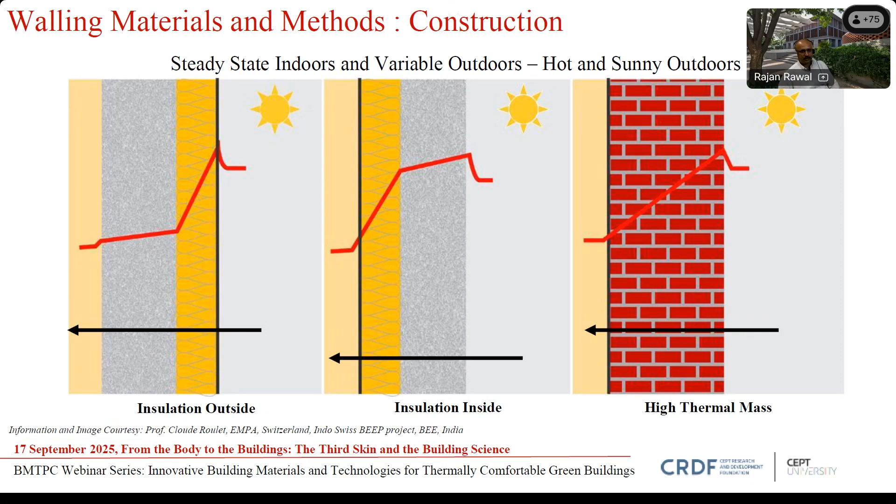So most of the time, people have this question: should I put my insulation inside or outside? The simple way of understanding is that if you have naturally ventilated or mixed mode buildings, you would not like to even warm up your walls, hence put the insulation right outside. If you are having an air conditioned building and want to retain the cool air within the room, put insulation right inside, where the heat transfer is going to start with. So that's how you decide.

BMTPC has done an amazing amount of work in promoting innovation with various kinds of technologies. The PMAY is one story, and their demonstration housing projects are another story, along with their own work towards pushing innovation. There are a couple of other stories which you will be able to find.

What we did is we helped people try to understand the U values, the overall thermal transfer values of these materials. You have conventional brick wall versus something called reinforced EPS core, where you have an EPS core in the center that you use as structural walls. Sometimes you have PPGI, which has insulation inside but metal cladding outside, or drywall construction. A whole lot of detail you can find on the BMTPC website.

At my university, we started looking at them and said, let's test it out and see how they really perform. As you can see, the brick wall, which is about 1.6, 1.67, a rat trap bond, the moment you start using insulation, your U value, the overall thermal transmittance, starts coming down drastically. That means you'll be able to achieve the Eco Niwas Samhita RETV values quite well.

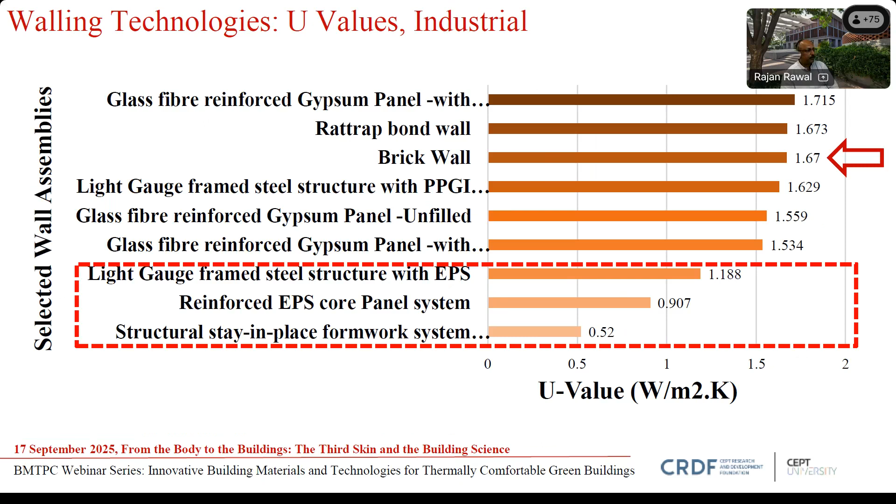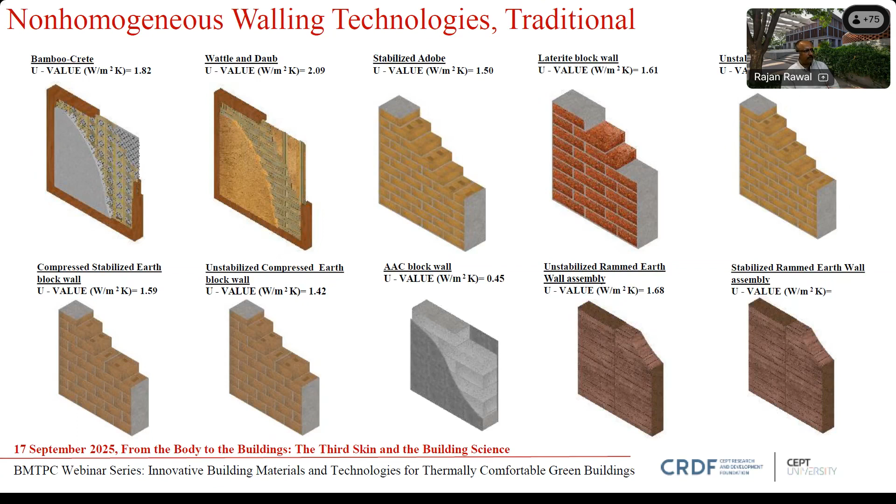This is where insulation plays a role. Alongside highly industrial production like this, we also give the same importance to our vernacular practices - what people have studied or practiced for many years in various climatic zones and geographical regions, whether it's stabilized earth block, wattle and daub construction, rammed earth wall construction, or even as latest as AAC blocks. How do these function? Here are the values for that.

Wattle and daub construction probably might not get you even a value of 1, but it has value when you really can't access industrial material. When you talk about embodied energy, there's probably an easier way to dispose of some of these materials, whereas industrial material needs to go through the cycle of industrial processing.

It's very similar to our glass bottles. Glass bottles are one of the best to keep hygiene intact, with durability and longevity, but when we want to dispose of the glass, it needs to go back to the factory. So it all depends on how you're looking at the life cycle assessment.

Some of these technologies can be used in rural areas or in buildings which have lower structural requirements and so on. You will find some of these documents - I will share the links - and the BMTPC website has these catalogs of materials as well as their thermal values and thermal transfer data.

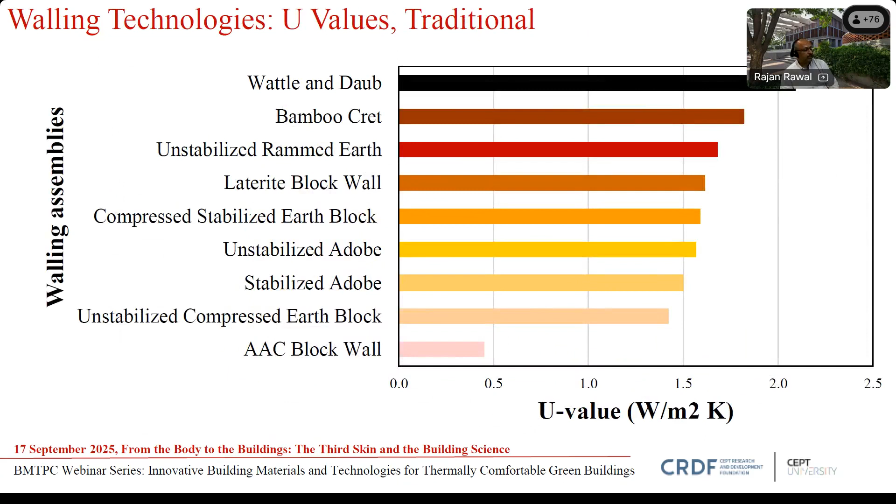Coming back to glass, we would like to have a glass which gives just light transmittance and not heat transmittance. You do get, at a cost, glass which has the ability to lower the heat gains through the glass.

From 300 nanometers to 2500 nanometers, if you use clear glass, it might bring a lot of heat. But if you have a low emissivity glass with some kind of argon filling inside or silver coating, it will bring in light but not the heat.

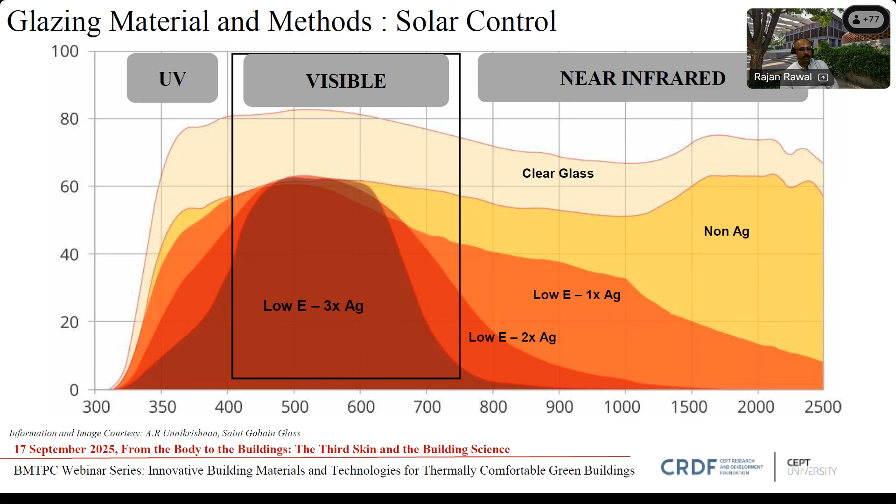These need to be used along with double glaze units. They cannot be used as single glazed units because the coating also requires some kind of environmental protection from outside. So one has to always balance between the amount of light you need and the amount of heat you don't want to get in.

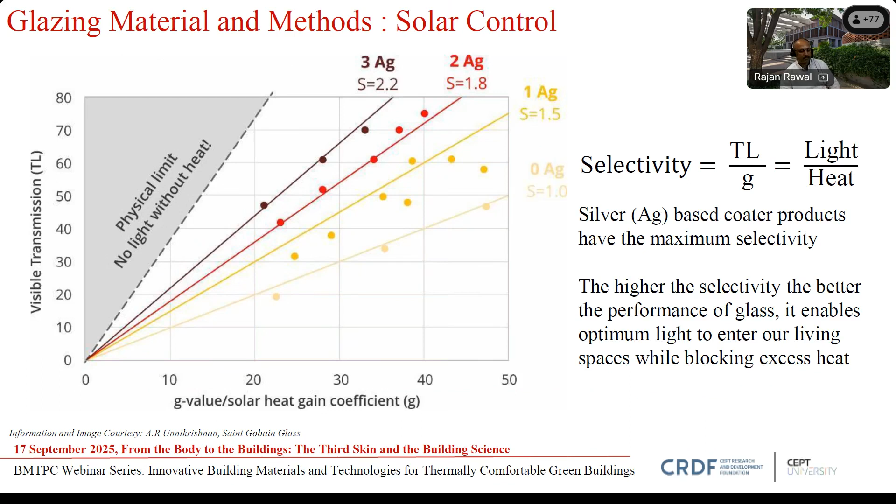There are some theoretical limits based on physics - certain things are possible to achieve, certain things are not. It's always a catch-22 situation: if you lower the solar heat gain, you will not get high light transmittance. If you want high light transmittance, then the heat also will start coming in. So the selection of glass becomes very important.

Last couple of slides on cool roofs, and then probably after an hour of talking, I'll end. Cool roofs are the ones which help reduce the surface temperature of the roof.

What these paints do is they reflect the sun during the daytime, but whatever heat gets stored in the body of the building material also gets released back. We call this the effect of emissivity. So when you say it's a white paint, it might be working during daytime, but another advantage it has is that whatever heat gets stored inside the material can also go back into the air, because the surface temperature of these paints, coatings, or tiles remains lower during the nighttime too.

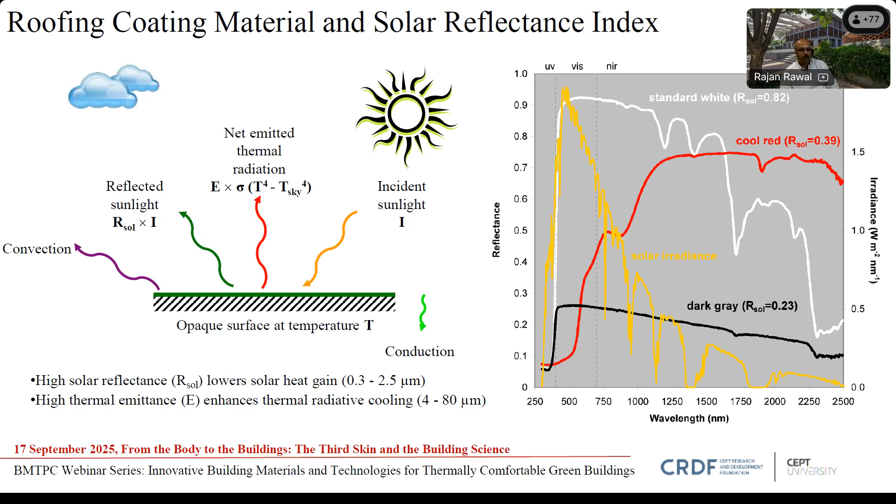There are three types of such products available. Some are paints, some are coated sheets from factory. Paints are very useful, but we have seen very good practices and also very bad practices of using paints, because most of the time people simply paint without realizing what the substrate is. Paint sometimes does not behave very well with any kind of substrate, so that's a very critical point here.

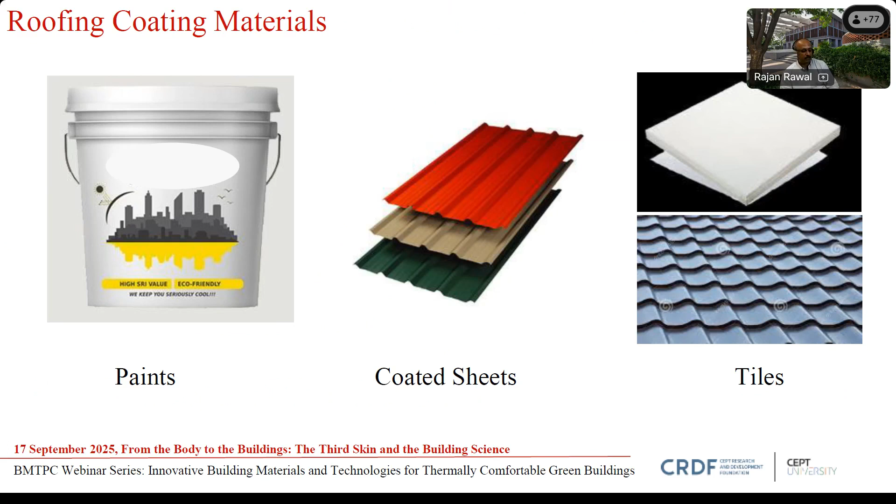With that, I will end my talk and would be very happy to take questions, queries, or even a discussion. Thank you.